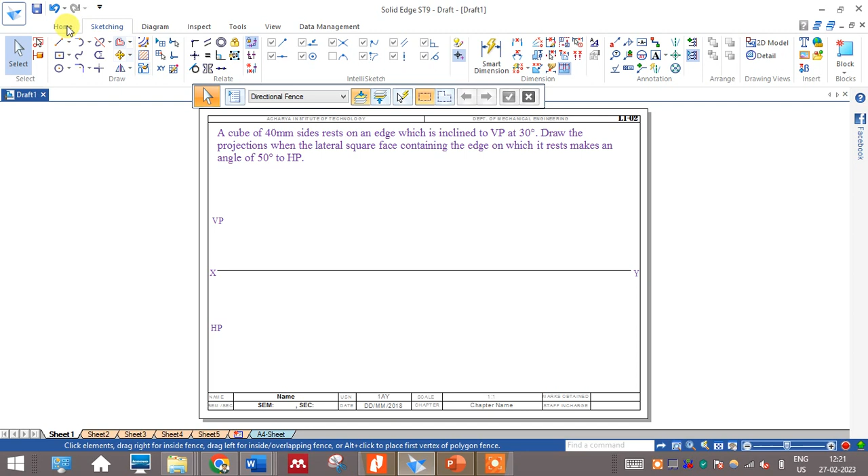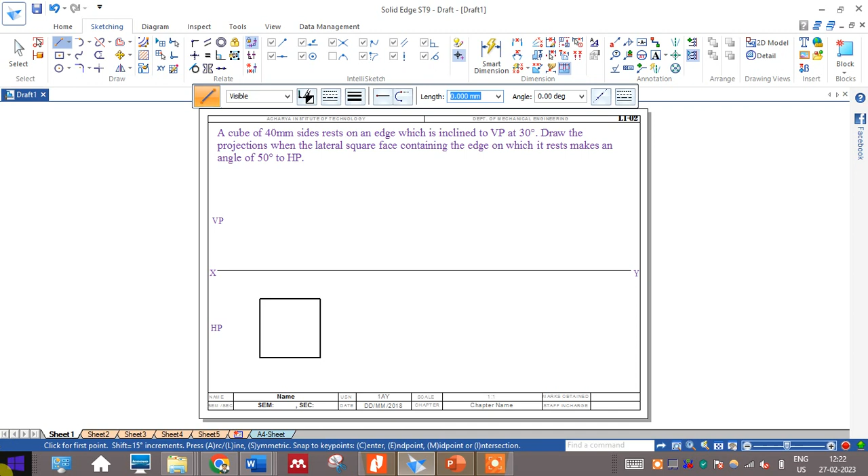I'll go to the line command and select the line thickness as a thicker one, say 0.7. Now I want 40 sides; I'll construct the top view of the cube. So 40 enter 0, 40 enter 90, 40 enter 180. I'm just adding 90 each time. So 40 enter 270. The top view of the cube is ready. To get the center, I'll connect the opposite corners. This is how it looks.

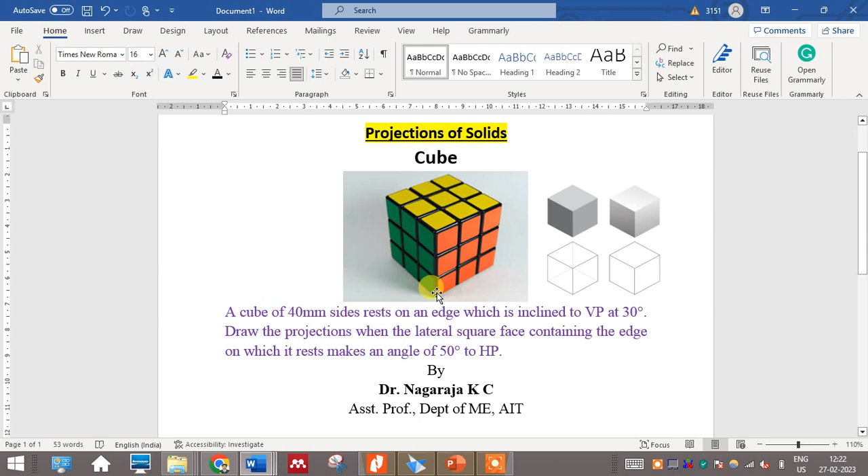As you all know, look at the sketch. There is a top face, A, B, C, D, and a bottom face A1, B1, C1, D1. Wherever A is there, A1 should come; where B is there, B1 comes. So there are two faces for a cube: the top face named A, B, C, D, and the bottom face named A1, B1, C1, D1. So let's start naming this top view.

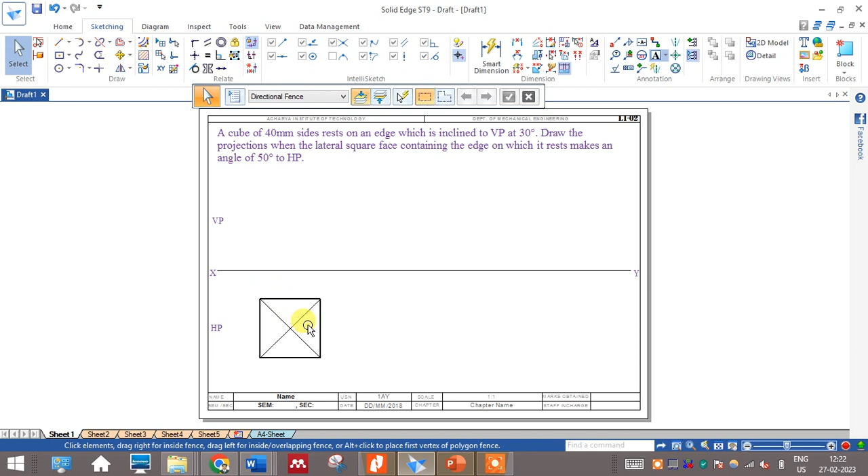I'll start from the right side, because I'm taking the right as a reference. I can take the left also and solve; that is also possible. So I'll write A, which is the top face point, and A1, which is hidden at the same point. Similarly, B in the bracket B1. Next, C, and this is C1. Next, the fourth point D in the bracket D1.

Similarly, there is an imaginary axis line, O inside the bracket O1. From the top center to the bottom center, we call it an imaginary line, which is the axis. Go to smart dimension, click on the line, drag it and keep it at a particular distance. Now I'll arrange these namings properly. I'll push it up, very near to that corner. Done. Now I'll start the front view side.

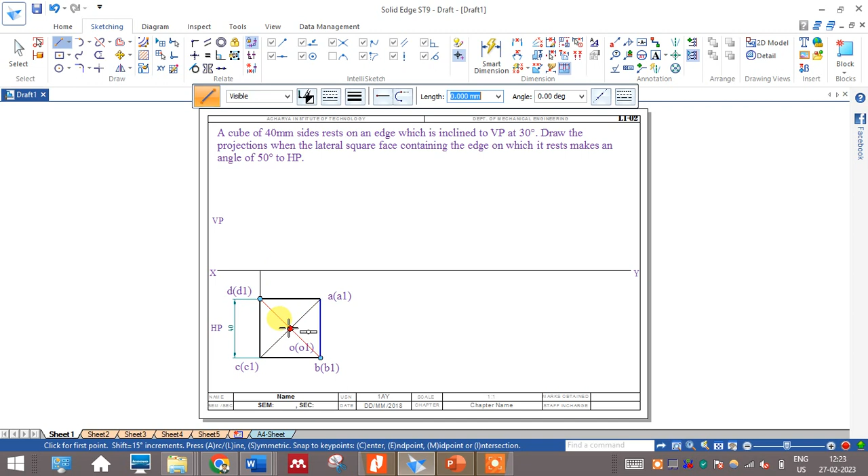Go to 0.13 for a construction line. Connect here to here, and the last point is here. First let me draw the base points. The base line is 0.7, which is a dark line. This problem is very similar to our prism problem also. I'll zoom it for you. I'll go to the zoom command and zoom this area.

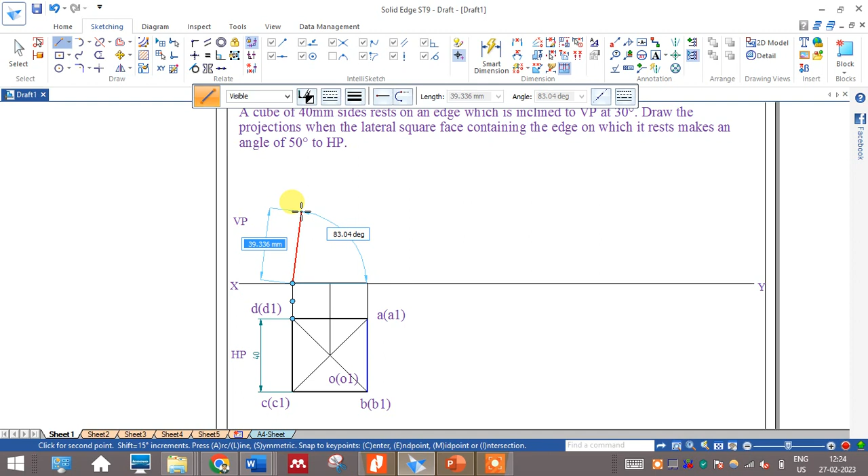Okay. So now the height is same as the side. You all know that it's a square, right? So 40 enter, 90 degrees, the height. So now use the alignment indicator, connect here to here, and there is an axis line. There is a provision to show the axis line. I'll just show it. I'm not saying axis is visible, but there is a provision to show. It's always an imaginary line.

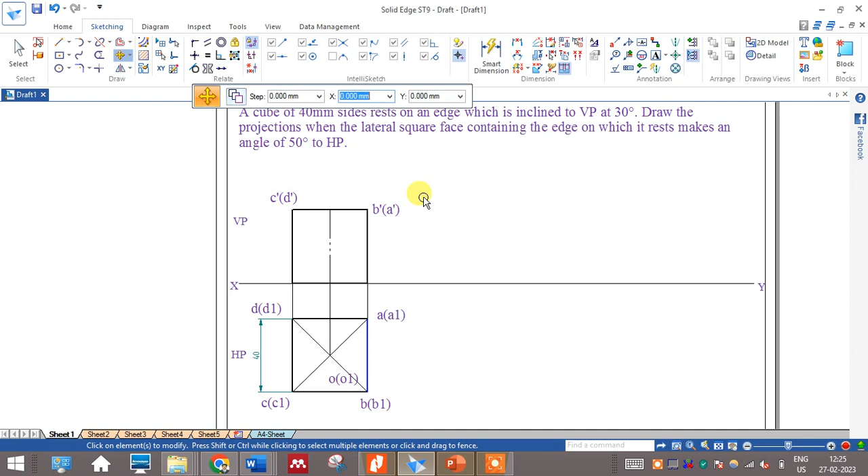So now try to understand the naming. So this point, if you look at this, observer is looking from this side. B1, A1 will come here, B and A will come here. So let me finish the top point first. B dash as well as A dash. Open the bracket, A dash. So similarly here C dash, in the bracket D dash. Done. So I'll just keep it away. So don't write any naming inside the solid. Okay. Just keep it away.

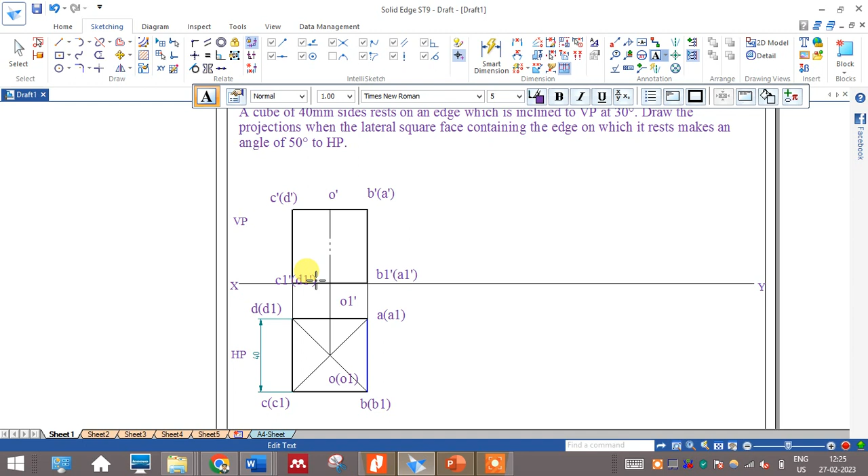So next, similarly we have one more point called the axis. So O dash. Now similarly come to the bottom point, B1 dash, in the bracket A1 dash, bottom points. Similarly here axis bottom point O1 dash. Now come here, this is C1 dash, in the bracket D1 dash. I'll just keep it at the particular place. I'll just arrange this here. Done. So all the naming done. Go to smart dimension. The height is same as the side. You all know that. So just show the side.

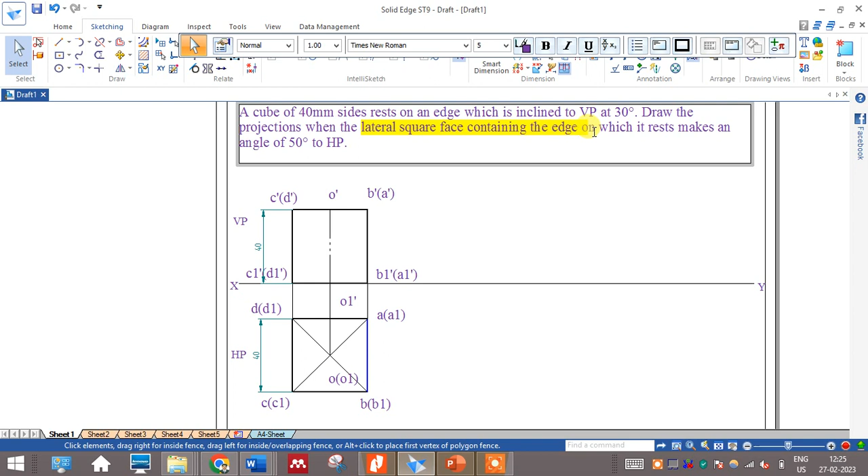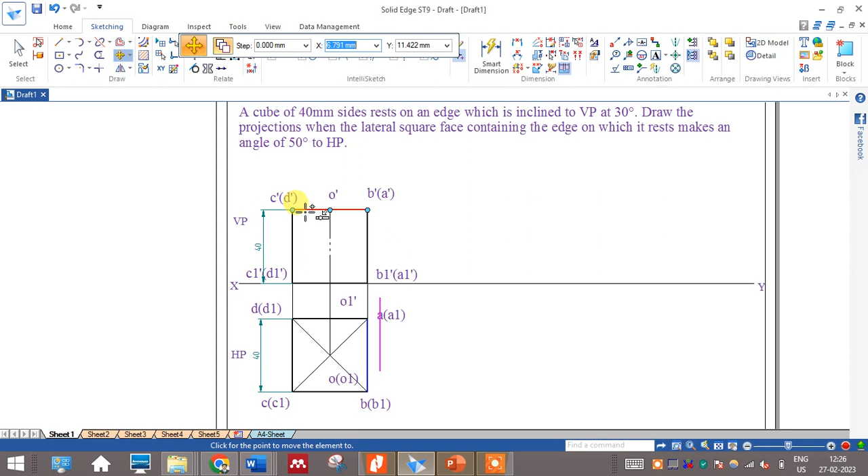First position is done. In the second position, what they're telling: draw the projection when the lateral square face containing the resting corner is inclined to HP at an angle of 50 degrees. So B1, as I said earlier, this is the resting line. So A1 B1 is the resting line. So on this point, I need to rotate the solid at an angle of 50. So I'll go to move option, switch on the copy command, because I wanted to retain the original and copy.

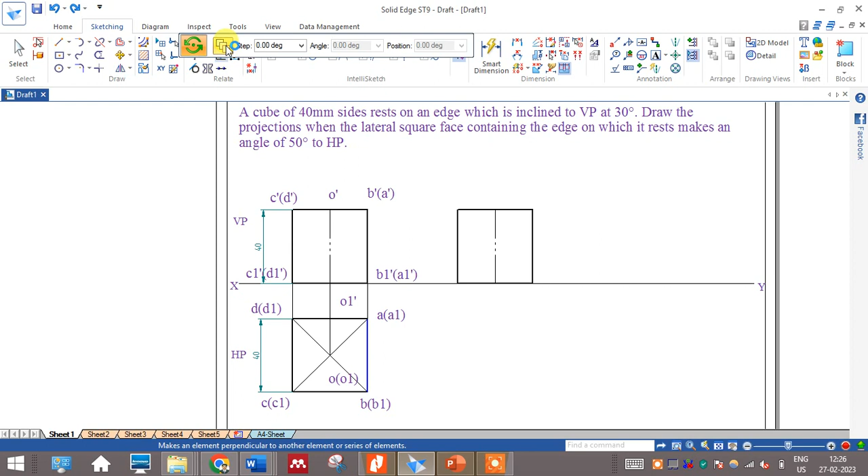So now by holding the control button, go to move. Select the entire solid. So now click on this particular corner, very important, click here and drag it and leave it here at a comfortable place. Done. So then go to rotate option, select the solid again. This is the lateral square face containing the resting corner, so it is inclined at an angle of 50. So 50 enter. So what is the mistake? I did not switch off the copy command. So go to rotate again, switch off the copy, select the solid, then rotate at an angle of 50. So 50 enter. So it is done.

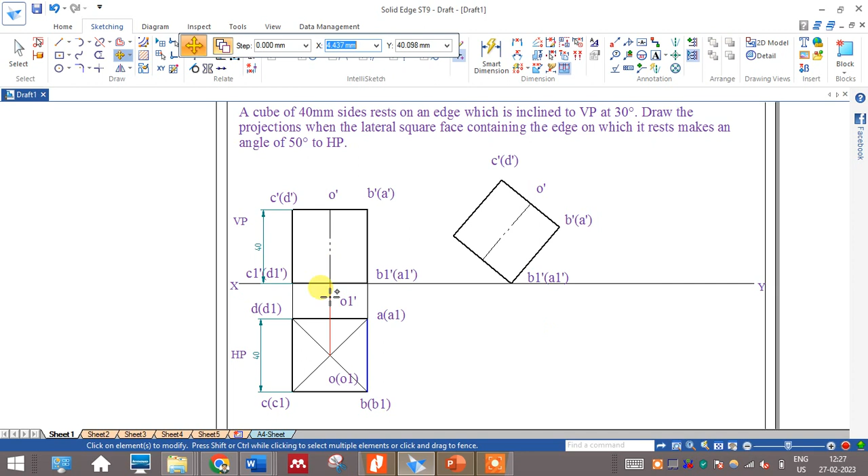So make sure that you have a comfortable place for a third position. If not, just push this solid a little bit left, so that I'll get a place. Since the naming of the first position and the second position are both the same, because the solid is same and the dimensions are also same, I'll just copy the same naming from the first position and paste it to the second position using the copy command. Done. So now go to angle between. Click on the axis line and show the angle. So it is at an angle of 50 degrees. Axis at an angle of 50.

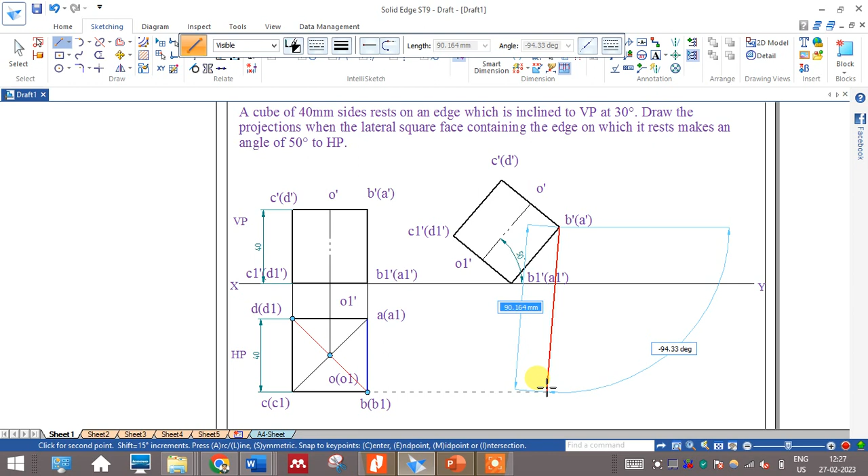Now go to line, 0.13 is the projection line thickness. Let me connect the top point, then I'll go to bottom point. So I can use alignment indicator here. So be careful, you have to connect the top face to the top face, bottom face to the bottom face. You should be very careful. So let us finish the top face first so that you'll not get confused. I'll not connect all the faces together. So I've taken only the top face, connect to the top face only. So just connect here also. This I need to change the type of line.

I'll make it. Done. So top face, go to text command, look here, A and B both are in this line, A comes here, so this is A, this is B, done. So next this is C, then finally we have D. These are top face points. So come to the bottom face points: A1, B1, C1, D1, four points similar to your top face. So now go to text again. So similarly right here A1, B1. So this is A1.

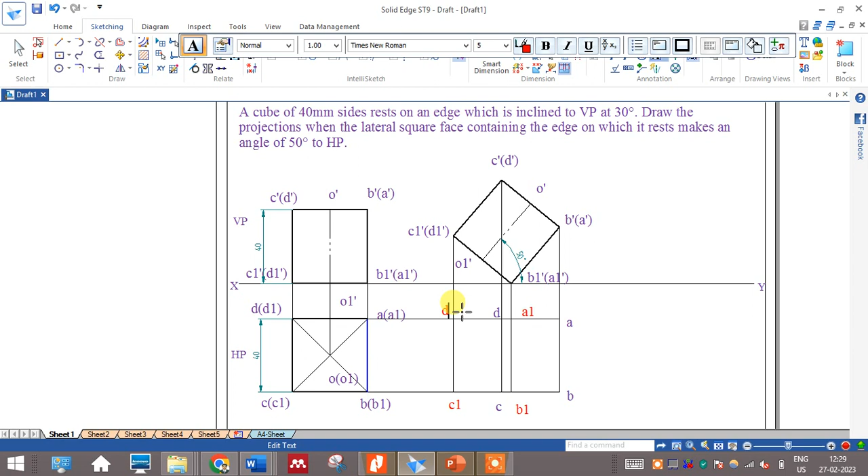So let me change the color for the bottom face. Later you can refer to it. So this is A1, this is B1. Similarly this is C1, this is D1. You all know how to connect that. So D1. So the axis point I have not taken now, right? Axis I'll take at the end. I'll tell you the reason.

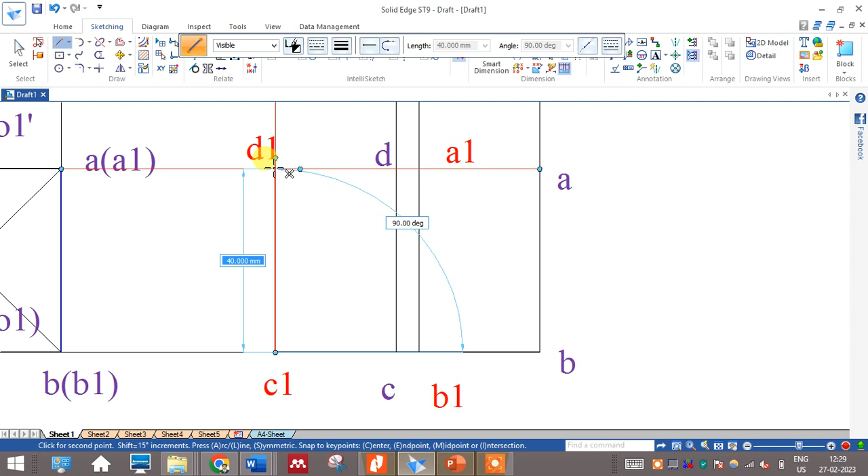So now take a line. Go to a dark line, 0.7 you take. First put the boundary dark. So I'll go to zoom command and zoom only this portion. Say this is the complete solid which we have. First let me put the boundary as a dark line. I'll put the boundary. This is the boundary. Intersection symbol. Here the end point. So boundary is there.

So to convey that boundary clearly, I'll just increase the thickness of this. 0.7 is enough for you. I wanted to convey it to you all, that's why I've raised it. So first point, boundary is dark. It is done.

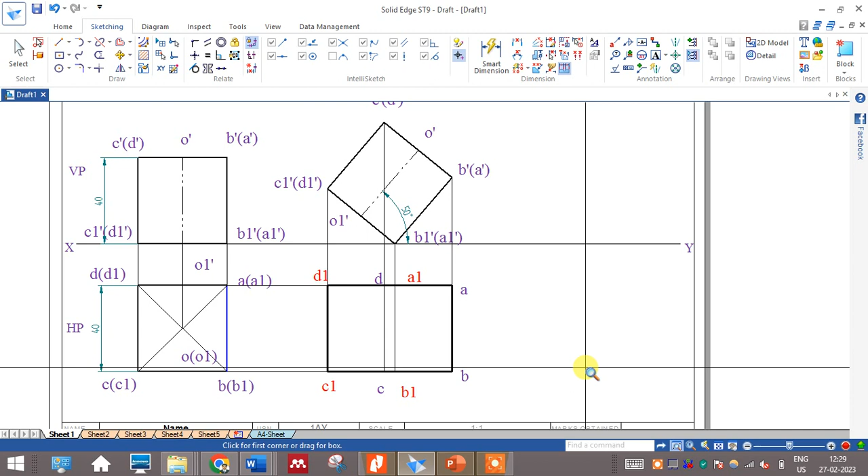Now you have to look at the solid and identify which should be the hidden points and which should be the visible points. See, assume that we don't have two lines here, because we have not decided them as dotted or dark lines, because we have done only the boundary. There are two lines left: one is A1B1, as well as CD.

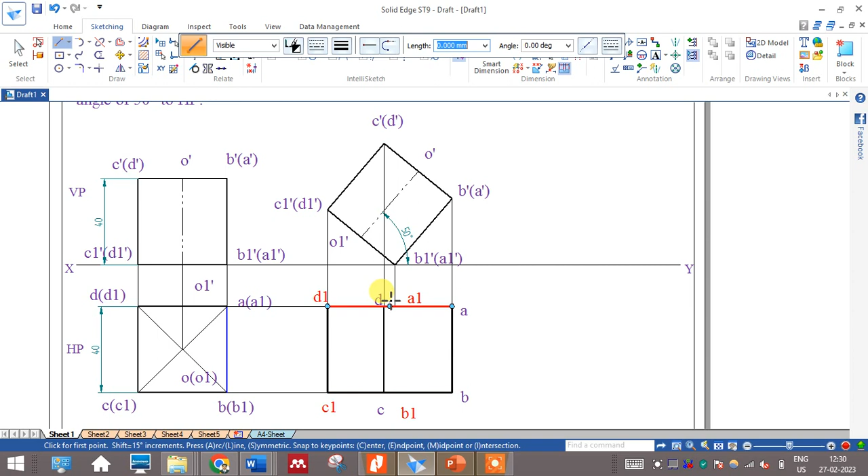So C and D, since this line is very near to the observer, it is a visible line. And the other way around, A1B1 is away from the observer; since it is resting on that particular edge, it is not visible, so I will make it dotted. Very simple concept. Now the axis line, as I said, I have not connected; give the last priority to the axis, because the axis is nowhere visible, it is only an imaginary line.

So drop the line, then I connect the center line to that. Now go to trim option, trim this, trim this, trim this. Now the axis portion I want. So either I can split this line at the end of this. It's not possible. Anyway, one second. I'll just go to trim, trim that center line also. It's not possible. Anyway, so go to a line.

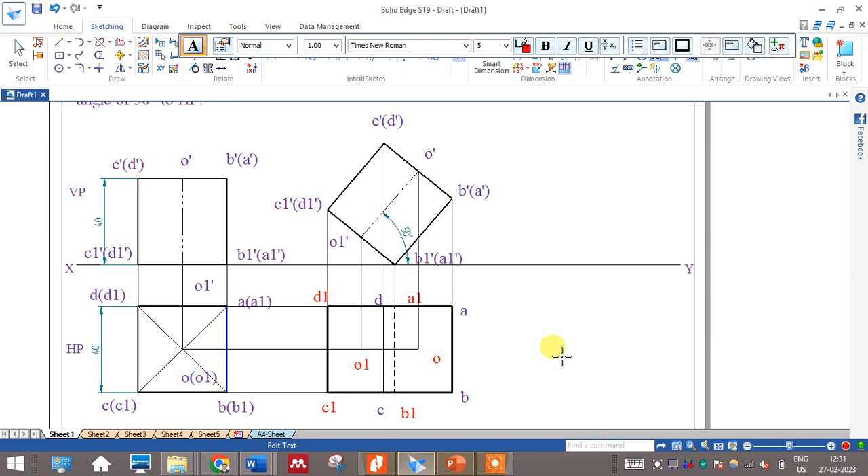So now take the axis. From here to here you mention it as axis. Done, the axis line. Once it is done, go to text command. Right here it is O1, because the bottom point is O1, and the top point of the axis is O. Done.

Now look at what they are telling in the problem. A cube of 40 mm sides rests on an edge which is inclined to VP at 30 degrees. So first let's take a 30 degree line. 0.13 is the thickness of the line. I'll go to 30, give minus 30 because we are going down. Done. But the axis line which you selected earlier is showing anyway.

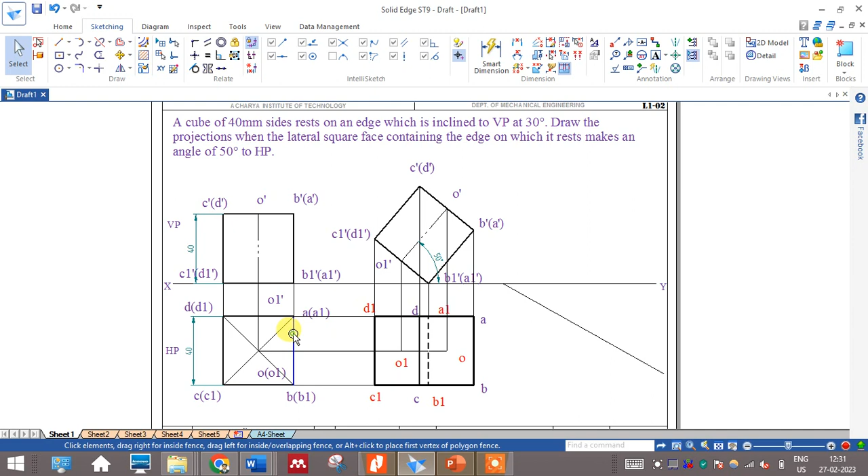So now the resting edge should be inclined, they are telling. The resting edge is this dotted line, A1B1. Look here, this is the resting edge. So I'll go to move option, switch on the copy command, select the entire solid, and copy from here. I'll click on A point, see my cursor is exactly on A. I'll zoom this area now. Bring that and place it here. Done. So the solid is placed.

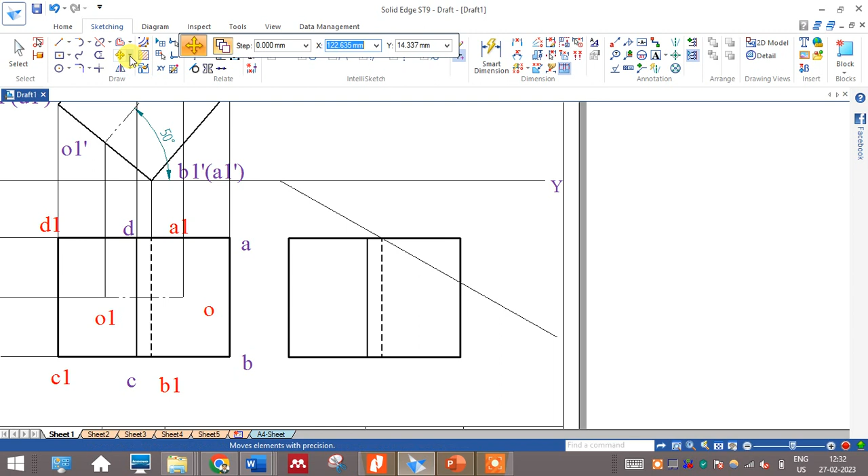After placing that solid, go to rotate option, select this. Select one end of rotation, the other end of rotation, and paste here. Since it is touching the XY line, I need to make some arrangement. It should not touch the XY line; it should be below the XY line. So I'll just select the complete setup, right? Switch off the copy. I don't want to select Y. Anyway, it has come. That's fine.

So there are two ways to do this. If it is possible to move only this solid a little below, one second, I'll do that again. So if it is possible to move the solid a little below, that also you can do.

See, now it is not touching. So it is possible, so let me go by this method only. So now show the angle here, 30 degree, done. So now naming is same as I said, you can copy or you can type, it's up to you. So let me copy that, I don't want to type because I wanted to convey the message that these two solids are same as well as the naming is also same.

So C point, then C1 is here, just copy paste here. So next D1, just click here, D1 will come, D point, D is here, A1 is a dotted line end point, done. So axis line I have taken, so either I can take the actual dimension or approximately I'll take it as axis, it's not a problem. Technically talking, you need to take the dimension here and then take the axis, so better I'll do that.

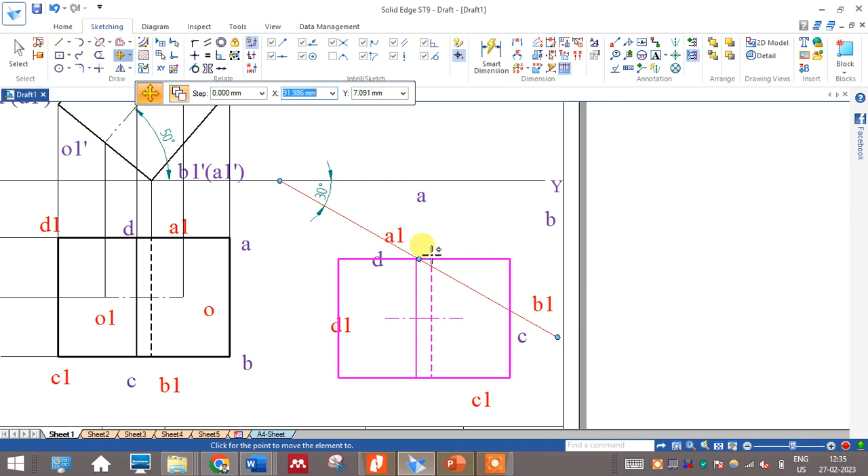So I will do one thing, I'll delete this for time being, let there be naming as it is, just delete, I will fit that solid. Go to move, switch on the copy. While selecting the solid, select the axis also, so that it will save our time. So now bring that, place it anywhere here. So now go to rotate. Now holding the control button you choose every line of the prism or cube.

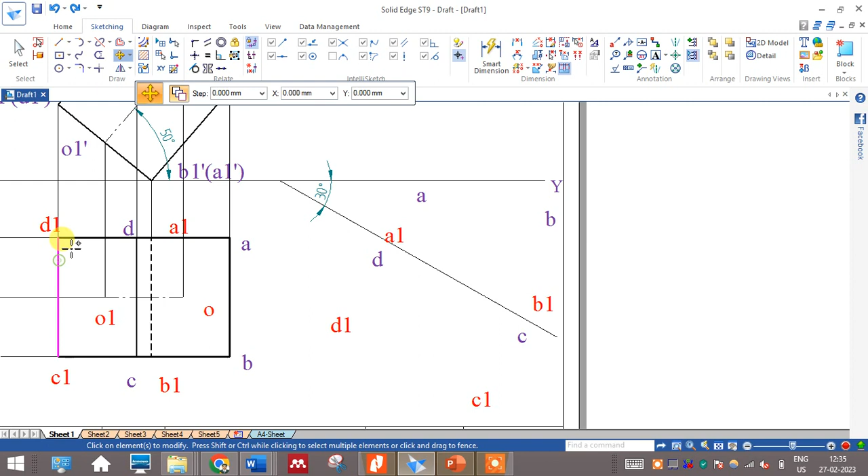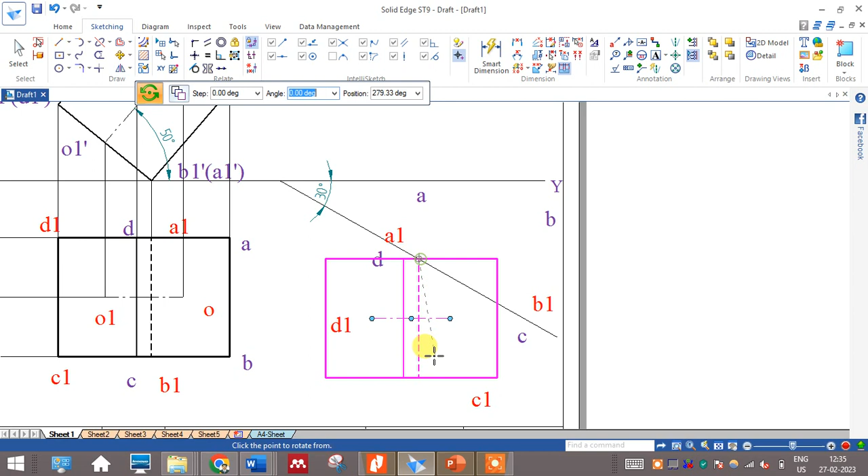So now actually I have to place the A point. I made a mistake, just give me a second. I just press control Z. Go to move, select. So I've got to know what was the mistake made. I should click on A1 point. So A1 is placed. So now go to rotate. Again, by holding the control button from your keyboard, you choose the solid along the axis. So now go to rotate, rotate this on this line. Done.

So naming here and there it happened. Anyway, I can fix that. So A point little near. A1 is here, correct. B point is here. I'm just realigning that. C1 little below. C is exactly correct. Then the B point. So now it is crossing the page. So what I should do is go to move, switch off the copy. Little left I wanted to take. Just left. Yes. Y point also came. Done.

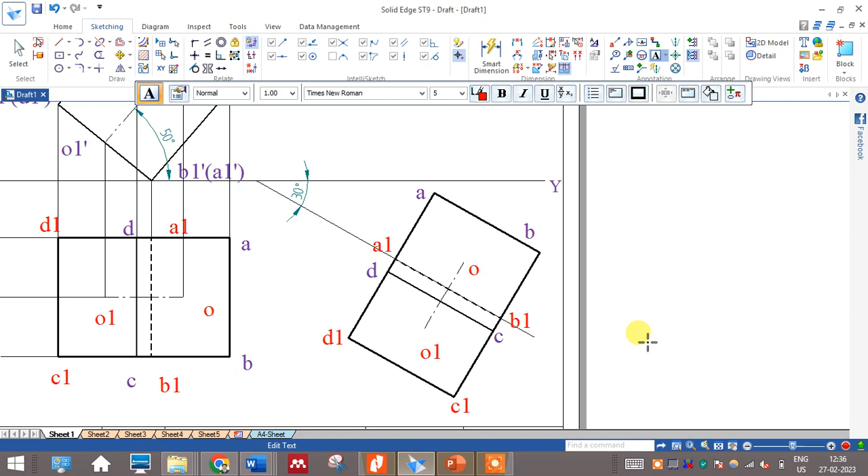So once it is done, I need to type O, O1. So O point is here, top point. Similarly O1 is here. Done. So give fit now. So I need to connect to the front view. While connecting to the front view, you should connect top face to top face. Very important. So I'll zoom only these two regions. So connect A to A of the top. Done. Similarly, go to B. B is also on the same line. I just connect B. AB is done.

I'll just change the line type here. So AB is done. So next go to CD. I'm concentrating only on the top face. So go to C point. C point is the topmost point. Connect to C. And similarly D also on the same line, so I'll just connect. So ABCD is done. What I'll do is I will name it first before I move on to the bottom points.

Let me give the naming here. So this is my B point, which is called as B dash now, it's a front view. So this is A dash. Similarly this is D dash, and this is C dash. Sorry, I have used one. One second, I'll rename it again. So start from here. This is A dash. This is B dash. This is C dash, and this one is D dash. Done. So A, B, C, D top points done.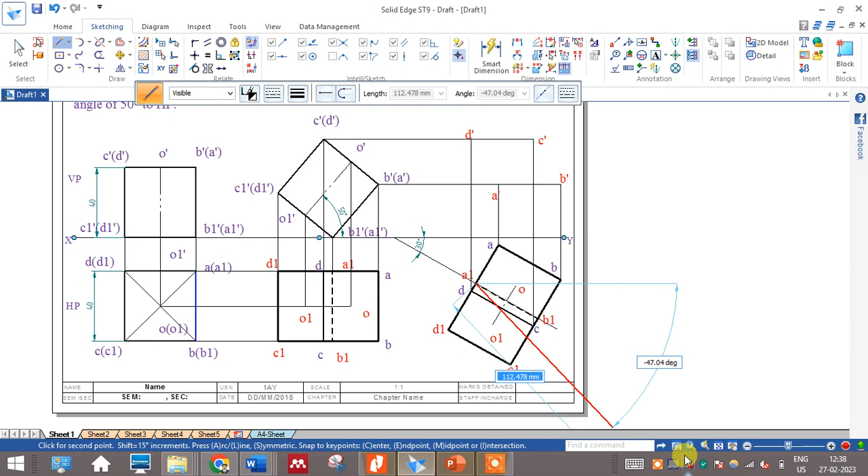I'll go to bottom points now. So click on a point, select the point thickness 0.13. So start from A1. A1 is here. A1 is on XY. If you are getting like this, zoom that particular area, then take a straight line, it will come. A1 is done. Give a fit command. Zoom if you wish now. So now go to line again. Go to B1. B1 is here, end of this. So B1 is also on XY. So C1 is this point. C1 alignment indicator is coming. Connect. And finally we have D1.

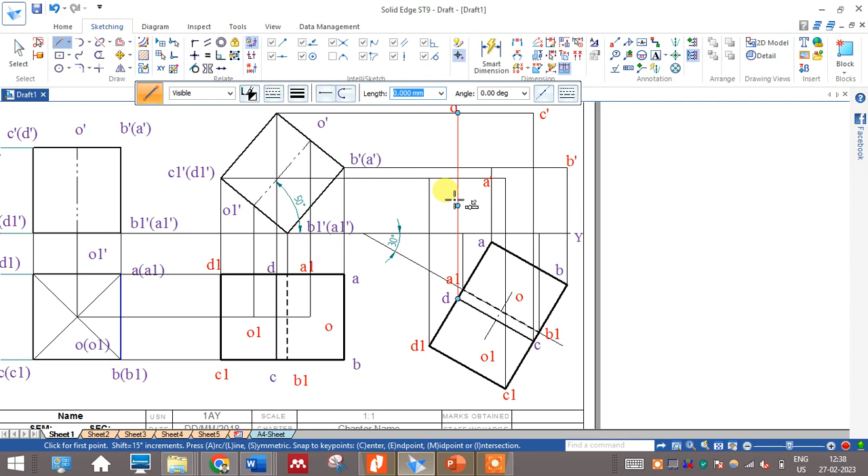So for our understanding, what I'll do is all the bottom points. Actually, I have to make it red, but by mistake I've given red for the top point. I'll change the color now. Right, top points are made as black. So I will use the red color for the bottom points. Okay. So this is D1.

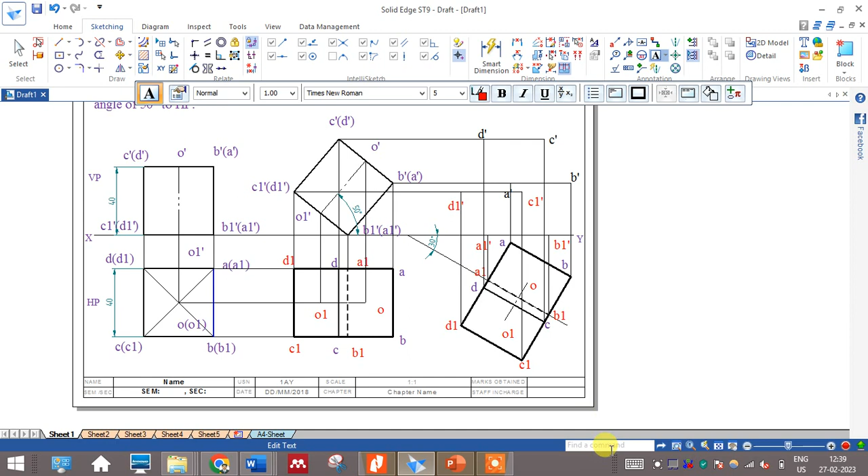So D1 dash. Right. So here it is A1 dash. A1 dash. Done. So this is B1 dash. B1 dash. A1, B1 done. Only C1 left. C1 is here. C1 dash. So now I have not taken the axis. Axis I'll take later. First put the boundary line.

So take a line. Let me take a little darker line. So let me use some color, a blue color better. So I'll start from the bottom points. I'll put all the boundary points and connect with a continuous line. So boundary is done. So boundary should be always dark, as I said in the second position also. So once the boundary is dark, now think about the inside line.

There are two lines. I'll zoom it for you. There are 2 points left out. So point number 1 is A, which is called as A dash, since it is a front view. So A dash point is here and C1 point is here. A dash belongs to the top face, C1 belongs to the bottom face. So A is here, C1 is here.

Once the observer is looking from this position, this view, C1 is very near to the observer. So the moment I call C1 very near, it is completely visible for me. Completely visible means all the lines connected to C1 are visible. So there is a connection from D1 to C1, C1 to B1. Similarly, C1 to C dash. It is done.

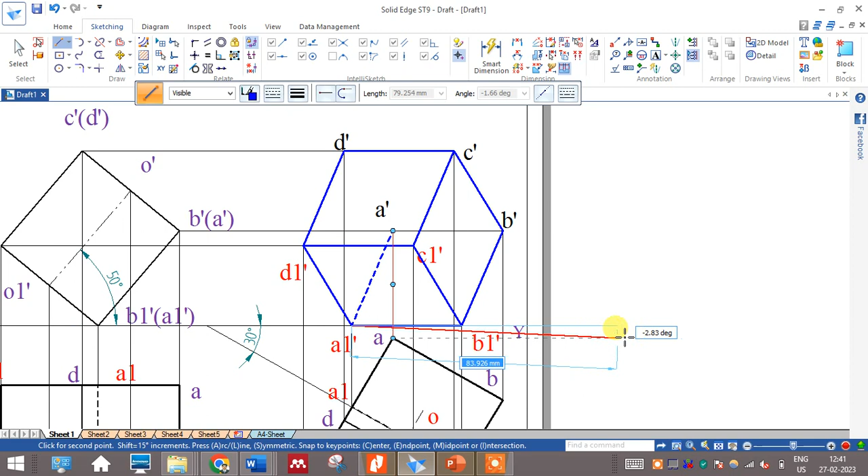Now what about A? Since A is away from the observer, it is not visible. Or else you can apply one more concept called two dark lines will never cross. How to apply that concept is, see, from A to A1 there is a line. It should be dotted because it is crossing the line which has already been decided as a continuous line. Similarly, A to B have to connect.

So A to B also is crossing the line C to C1, which is already decided as continuous. Because of the star connection: if two lines are dotted, the third should be dotted. Two lines are continuous, the third should be continuous. Use that concept. So A point is completely hidden now. The moment I call some line or point hidden, I should keep that in a bracket. So I'll keep A dash in the bracket to convey that it's hidden.

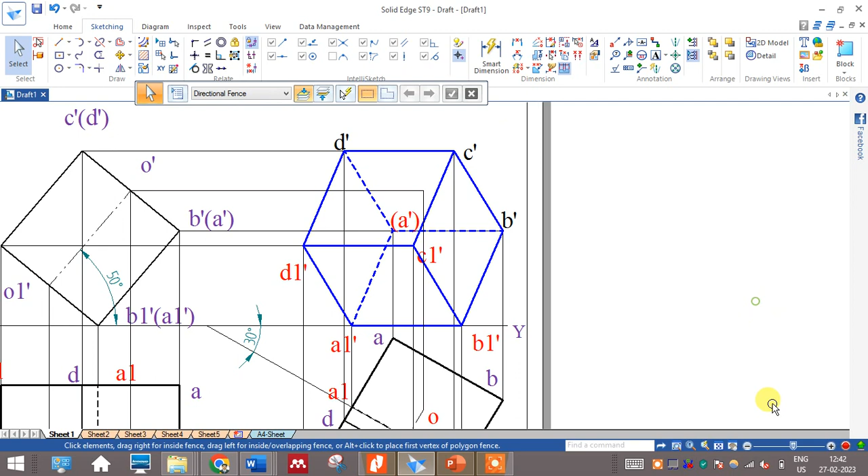So now for axis, solid construction is done. So I'll give the last reference for the axis. Axis O should be connected to O. I'm taking it at the last because axis is no way visible, no way hidden. It is just an imaginary line. So keep always the axis line as a very thin line. So now bottom point of axis I have to make.

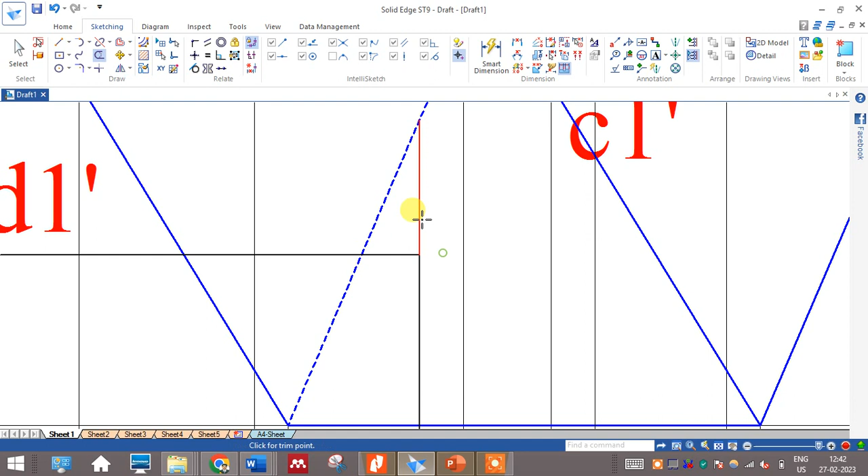Now I'll connect. So go to line. Bottom point of axis is here. It should be connected to here. If it is not matching, we just use that. Now use the zoom command. Trim all unwanted portions of that particular line. Unwanted, unwanted, unwanted. Now select these two lines. Then make it as a thin line or a construction line. So finally I need to show the axis line there.

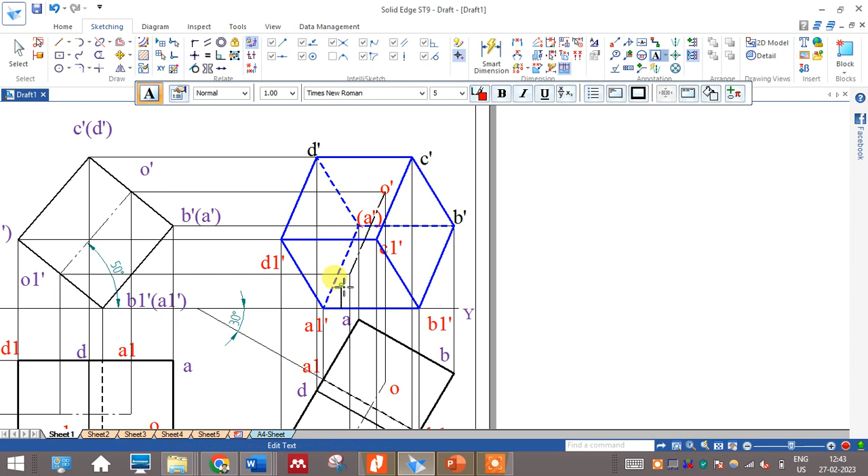I'll zoom it for you. So take a line, 0.13, an axis line. So from here to here I'll just connect. But I need to name it. So this is the top point O dash. And the bottom point O1 dash. Okay. So this is the final solution for this particular problem. Same thing you have to do on a paper or a sketchbook also.